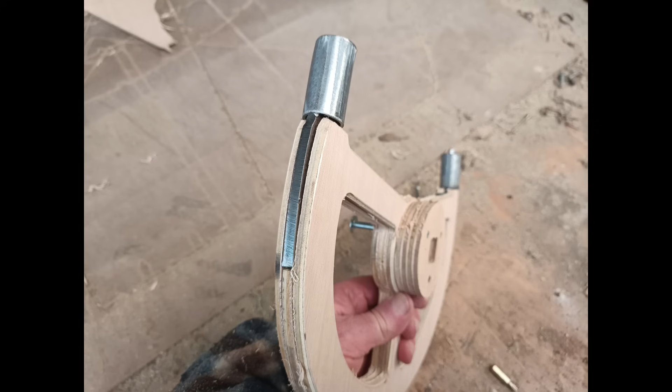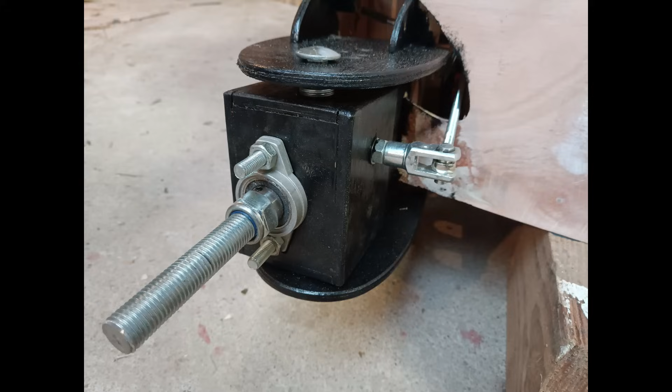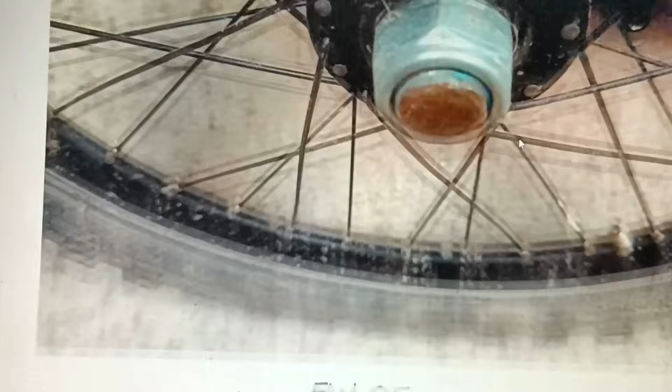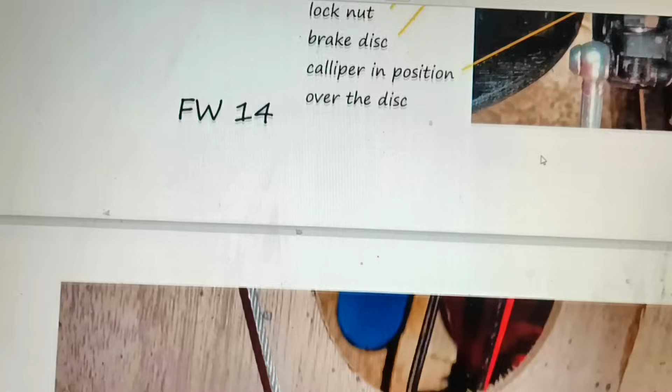Of course, you could design your own one, and I'm sure it would be very good, but I suspect it would take you a long time to figure out all the important geometry and measurements and complicated connections, because there is a whole lot going on in a little vehicle like this. Rigidity, strength, weight, layout, shafts and bearings, brakes, suspension, steering, pedaling, gears, electrics, a roof, and how do they all fit together and interact. See, there's a lot going on.

But I've done all that already for you if you like. And I've made lots of drawings and taken lots of photos, and they go together with 50 pages of written instructions to describe how to make the car.

And remember, this is a car you could make using only woodworking tools, because this is basically a wooden car. Plywood and spruce timber glued and screwed together. Yes, there are a few metal plates and lots of other components needed, but the basic car is a timber shell with the other parts fitted to it.

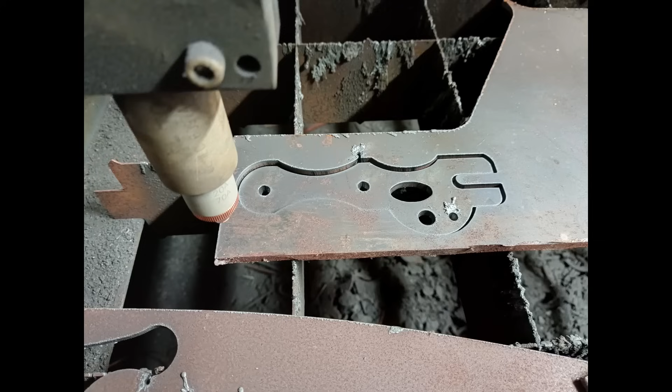And those metal plates aren't that tricky. You could even cut them out yourself from a sheet of aluminium if you wanted to, or take these CNC files to your local machine shop where they could cut them out of steel, which will be cheaper. Or there are online cutting services that do the same thing. Or if you live in the EU, then I could cut them for you.

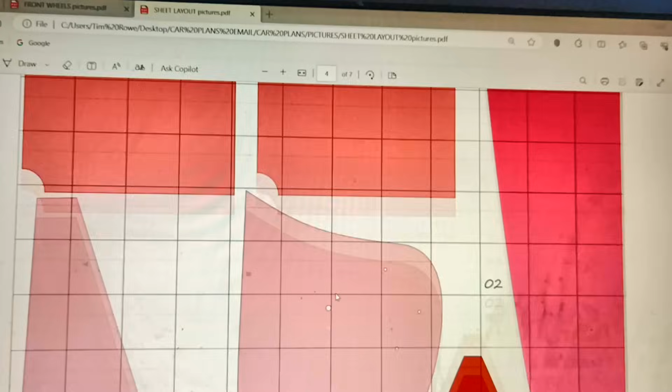I have worked very hard to explain every step because I want you to succeed, because I love my little wooden Motts, and I think you will too.

For instance, last week I drove to town in them twice, and then drove 15 kilometres to our friend Christine's work meitheal, where we mulched willow beds, and then drove home again. And then last night I met the lads down the pub, and that meant driving a few miles in the complete darkness. No street lights here, of course, all without any problems.

In fact, I only used my big car this week because I had to hire a generator, which is heavy. Otherwise, my small cars would have done everything.